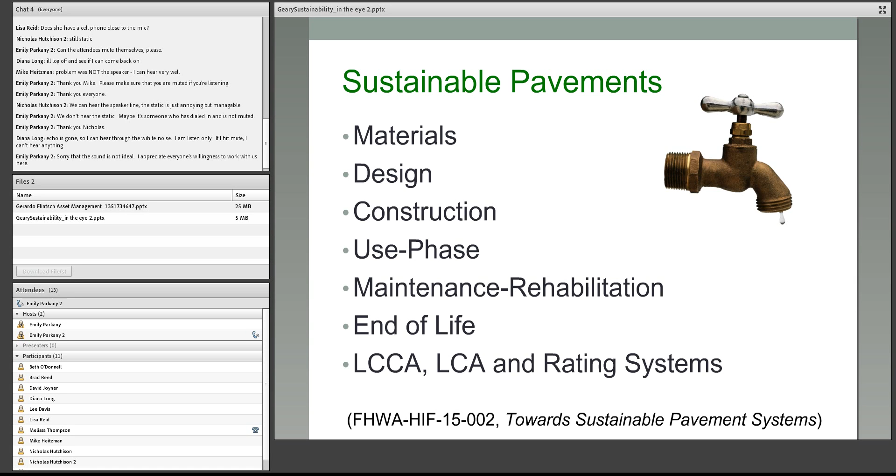This was something I thought was interesting - this was in chapter 10, on the future and environmental product declarations. I recently saw this in another presentation in an asphalt arena where they talked about UTC codes for materials in the future. And this is a concrete mix design and the environmental impacts for a concrete mix design.

And you're looking at the global warming, you're looking at ozone, you're looking at the whole environmental things. Now, as a materials person, I was a little bit concerned that they had two lines for performance metrics and over half a dozen lines of details and metrics for the environmental issues. But this was just a snapshot. If you look at the full document, they do have the complete performance metrics too, along with some more environmental impacts.

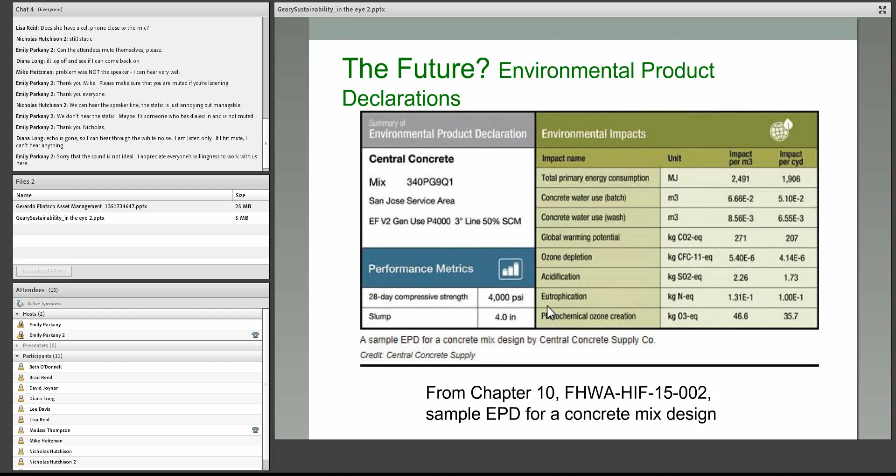First, I think education and people coming up with new things, that's sustainable. And the corollary is, mandating specifics, I think it's detrimental. You really need to provide people options. I know sometimes you got to mandate things to get things done, but if you mandate options instead of just mandating one way, that's a better way to think about it.

We talked about how it can take time for sustainable, and then the context nature. So when I took over the materials lab in 2000, we already had a standard on the books that said you could use recycled concrete to be a replacement for virgin graded aggregate base. But I couldn't tell where anybody had done it.

And so I actually saw a presentation somewhere else where a recycler was showing how to do it. You can't just recycle and throw it back in. You've got to process it. You've got to handle it correctly. There's steps that have to be taken.

And so I invited that recycler to come to our annual contractors meeting, just to kind of see if they would listen, I guess. And they did. Boy, did they listen. The recycling increased that next year, up to 500,000 tons. And now we're at about 100,000 tons a year, which is about 10%. And for an aggregate-rich state like Georgia, 10% is pretty good. We have lots of aggregate, lots of good aggregate. We're taking a bite of that pie, and it was just based on education.

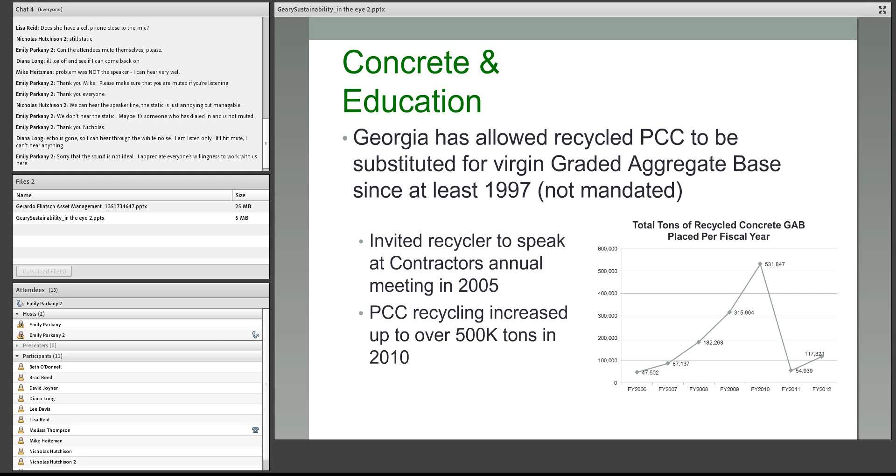Sometimes if you provide the contractors options, they'll come up with it on their own. On Interstate 16, they're out there right now recycling 100% of the concrete back into the shoulder pavement. And we've never done that before in Georgia on an interstate. Now, the contractor already had options for the shoulders, and so they came in and requested this as another option.

And we had the experience already with the concrete recycling on GAB. And from what I understand, the project is going great. I'm actually going out there to see them next week to get a visit of it.

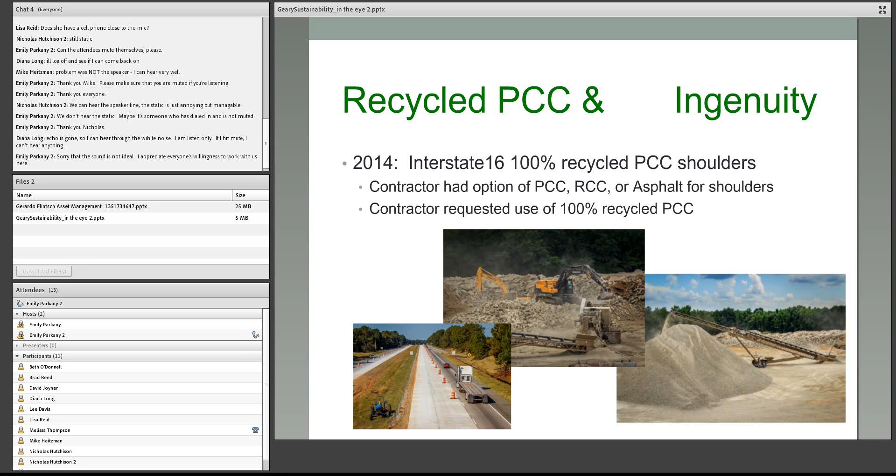Let's talk a little bit about time on sustainability. In 1981, I was doing some research on old interstates and found out that we actually put RAP in an interstate pavement back in 1981. I graduated high school in 1981. I mean, and I just retired. That's a long time ago. We've been doing RAP a long time.

And then we had a standard specification in '93. So another 20 years, just in 2012 - because what's happened is when we started out, we were at 10 and 15% RAP. And that was okay. But now, as things are getting tighter and asphalt got more expensive, contractors wanted to put 20%, 25, 30%. The same thought pattern that we had on the 10-15 didn't work on that 25 and 30% RAP.

And so we had to tweak those requirements. We were finding pavements that were cracking up within 4 years. We expect a minimum 10 years for our resurfacing. They were cracking up where we were having to resurface in 4 years. And so you gotta, I don't know if it'll ever be sustainable. You're never gonna reach sustainability. You gotta continually look at it and make changes to make sure it's sustainable.

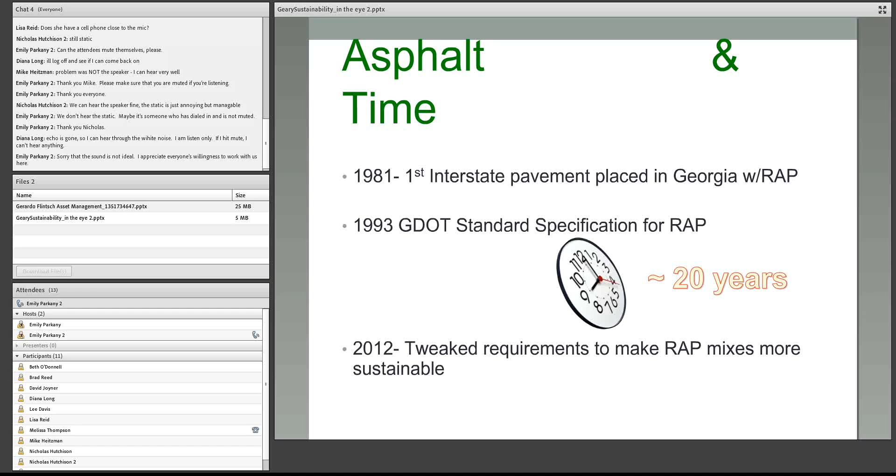Now, no money doesn't have anything to do with sustainability. It's actually a negative part, but that's what caused us to start using micromilling.

And this is more of a context thing. Georgia, conventionally, on our high volume interstates, we had a special mix called SMA, stone matrix asphalt, and then a thin mix on top of that. In the past, we would just mill off both of those and replace both of them. And we got to saying, hey, we need to find a way to save some money.

With a conventional milling head, we weren't going to be able to just take off that top mix. So we worked with the manufacturers and came up with this micro mill milling head that'll just take off the surface mix. So we're reusing that SMA for another time.

But if we're required on this project to check a box to get recycling, we won't be able to do that because it doesn't use any recycled material. We don't allow recycling in that top 1 inch because it's just too thin to use recycling. So that's the problem if you mandate something and say it has to be recycled - that can cause you problems, and then this process wouldn't work.

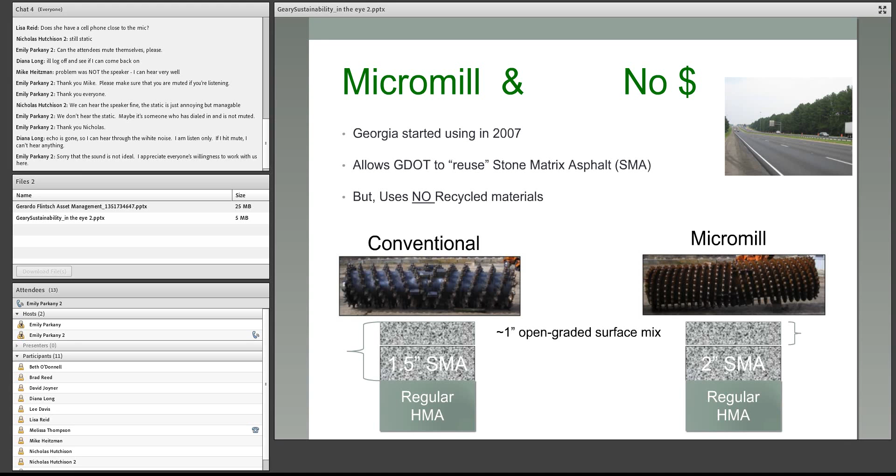Crumb rubber, that's ground tires. And this is another kind of a mandate thing. Pretend that mud is actually asphalt, because that's what happened. When I took over the materials job in 2000, my predecessor had left me a picture from the newspaper where cars had been stuck in the asphalt because of a crumb rubber project. We had a really bad experience. I couldn't find the actual picture, so I got close, but the picture itself is seared in the heads of the people that went through it.

And so sometimes when you mandate things and they go bad, it makes it even worse. But in 2007, we had problems with polymers in our asphalt - the prices were going crazy out in the roof. And we use polymers in a high volume. Polymers make it better than just regular asphalt.

So we looked at it again. This was another contractor that came to us and said, hey, we want to use this option because the polymers are so expensive, this will save money. And so Georgia DOT placed over 500,000 tons since then.

Now, we're not just assuming that it's going to work and that it's going to be the same as polymer. We're doing testing. We've got ongoing research that's looking at those original projects just to make sure that our assumptions that it is good are good assumptions. You don't want to find out after you have all these roads paved that they only last 4 years.

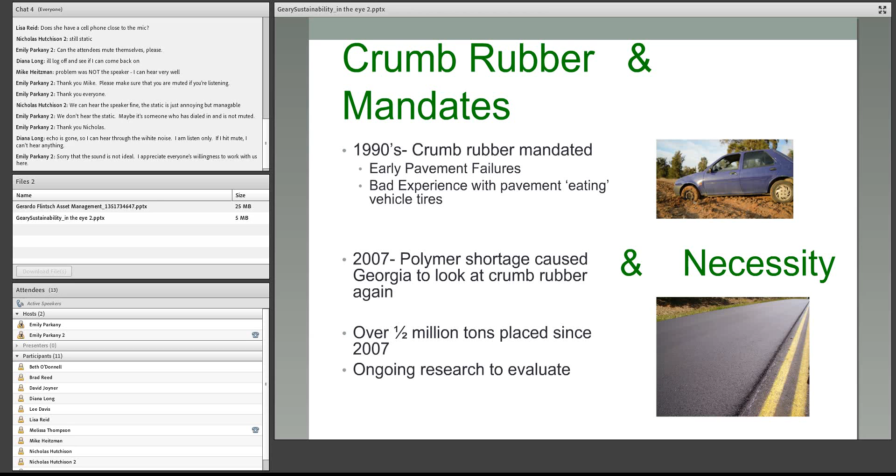All right, I said I would take you back to reality, and this is kind of my request as a materials practitioner and former DOT person. This is what the materials folks need - we need those vetted guidelines related to the environmental issues, and we need to get all those people together to make those decisions. And those are the hard decisions.

But you know, you can't leave the materials person to be the sustainable guru. They need the help, they need some input. But listen to them, too.

And then give options to fit the situation. I think it's always better to have options than to mandate something one way. Especially since sometimes the industries want to get it mandated a certain way - different industries have been known to go to the legislature and get laws made that mandate something a certain way, and that usually doesn't turn out good. And then trust them to make the right decisions once they have all the information and the input. Thank you.

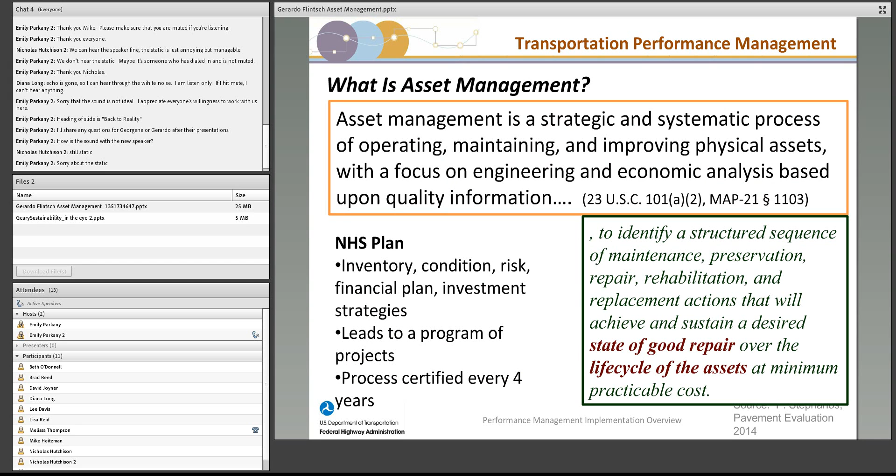For this, I've been using over the years a scheme that says the heart, the foundation, of any asset management system is a database where I know what I have—I need an inventory, I know the condition of those assets, I know how much they're used, and I also know what we need to do with them.

Based on that foundation, I will support a series of business process decisions at three levels. On the strategic level, I set performance targets, which we talk about first thing in the morning. That has to be associated with a budget. If I set very high standards, I'll need more money; with lower standards, less money. So I need to balance that trade-off.

Then I need to make decisions about my assets at the network level. At this level, typically I have systems to handle my pavements, bridges, signs, etc. — a series of individual engineering management systems that, hopefully if my asset management is mature enough, will integrate into a decision-making process that considers both performance and cost.

And I would argue we also need to start incorporating sustainability into those decisions — environmental aspects that will make our decisions more sustainable.

Once you get a work plan, with all these asset management network-level tools that let us predict condition and optimize investment, we come up with a work program. Then I need to design each of these treatments, each project in the work program, to be able to execute them.

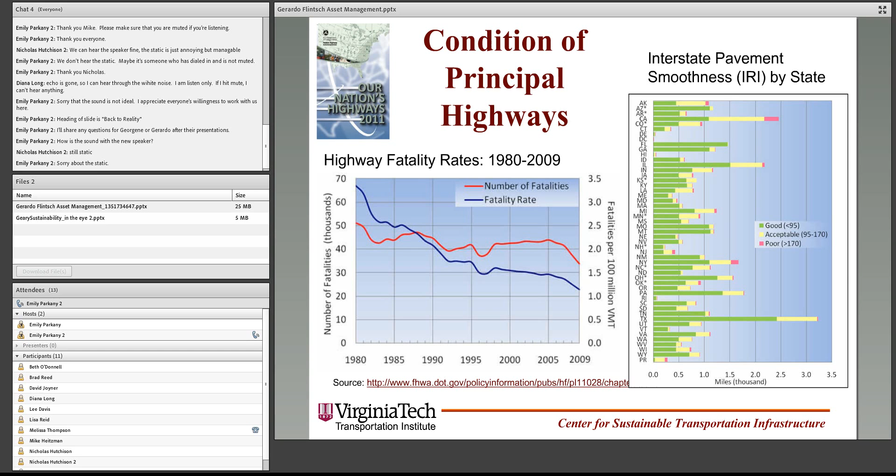That's at the national level. Most states at this point also have performance measures they share with users at the state level. Virginia has a dashboard that covers everything from road conditions to project delivery and many other performance metrics, published in a quarterly report posted on the website.

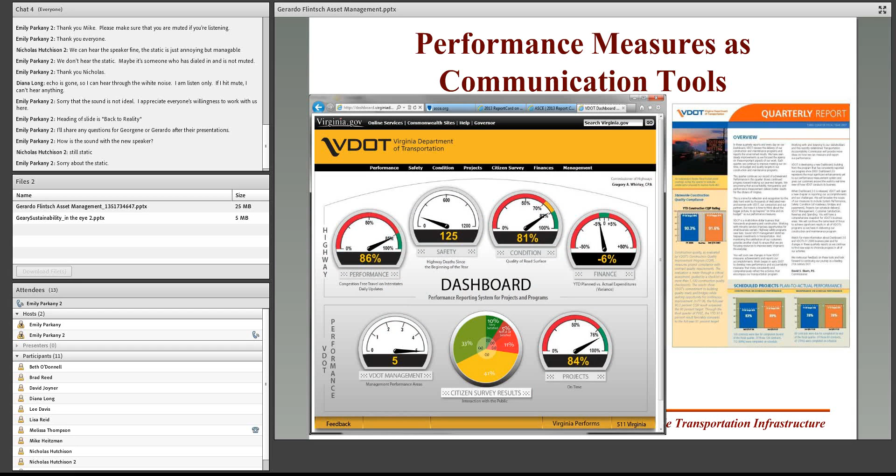So we have a series of goals that are translated into something we can measure, and those measures are what we use to track our performance — how well we're doing in making our investments.

That brings us to the last concept: state of good repair. I struggled to find a definition, then found one and adapted it slightly: the state resulting from applying transportation asset management concepts, balancing economic and performance aspects, in which an agency maintains physical assets according to a policy that minimizes asset life cycle costs while avoiding negative impacts to service.

Again, I would argue we probably need an environmental component there too. And of course, it's hard to define by itself, but easy to define what is not a state of good repair. And if you believe an ASCE report, most of our infrastructure is in a state that is not in good repair. So the common themes are: achieving and meeting certain levels of service and performance for the user, performing maintenance, repair, and rehabilitation according to the policies we set to help us achieve our performance objectives, and reducing or eliminating a backlog of unmet capital needs. The 3.6 trillion that ASCE cites may be too high, but it's in the right order of magnitude, so we have a big backlog in our infrastructure in general.

And of course, that's what we try to do with asset management. I would argue all three of these concepts work together to help us align our decisions with our performance measures and performance objectives.

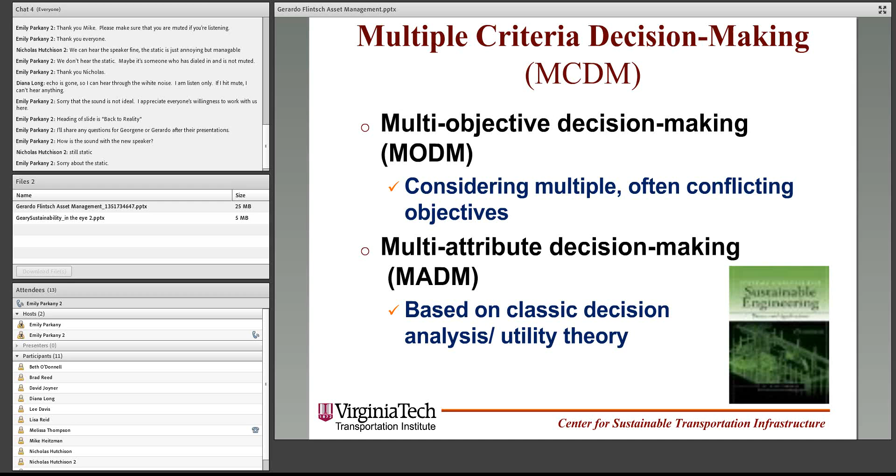So that's one way, and then you also look at maybe projects and comparing projects. There are other types of tools within this family of multi-attribute decision making that usually involve utility theory, decision analysis, and so on. So there are tools, and in particular, I'm going to focus on just one to illustrate this.

If you look at optimization, it's a decision-making tool that selects the best combination of treatments, where we need to act, what type of facilities—bridges, pavements—we need to fix, what type of treatment we need to apply, and when is the optimal time. So I can set that to achieve a specific objective.

For that, I have operation research techniques I can use. Again, the main part there is I need to figure out a realistic decision-making process and come up with the mathematical models that allow us to model that.

And of course, that implies that if you really want to achieve sustainable transportation, I need to consider multiple objectives that reflect these three legs of the sustainability concept, the triple bottom line: economic development, ecological sustainability, and social desirability. I would call this high-level performance, which I can then reflect in objectives, and I can come up with ways of measuring that, and I will have to do some trade-offs.

And usually what happens is there's not going to be one solution that's better. What we have is a family of solutions that, from an operations research terminology, is called a Pareto set of solutions that satisfies the constraints and gives a good balance between the different objectives. If we go back to the two objectives we've traditionally used in pavement and bridge management, those are

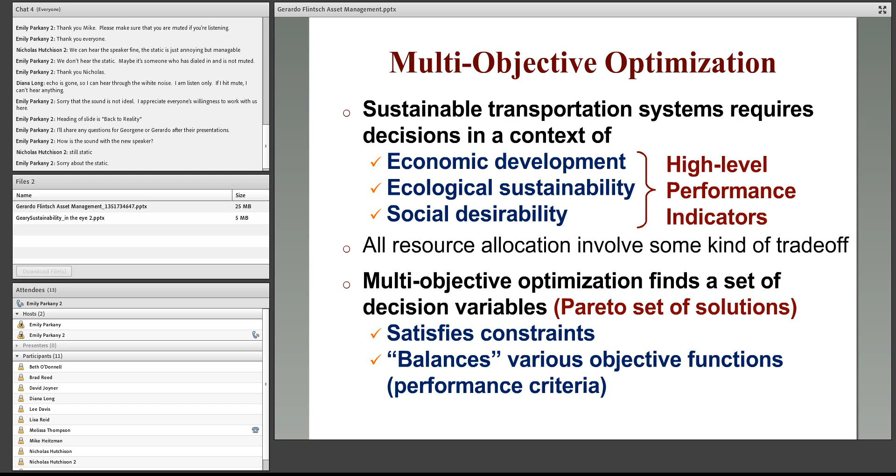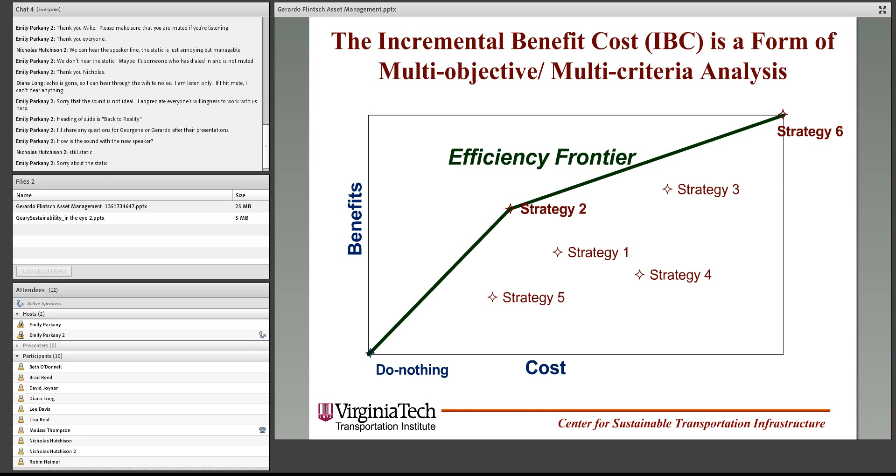And in pavement management, for many years, we've used this concept of incremental benefit-cost to do an approximate optimization for our investment. Most of the pavement management systems we have right now, and a lot of the bridge management systems, use this concept. It's an easy way to figure out, depending on the budget I have, which strategy I can choose that will give me the optimal benefit for that level of investment.

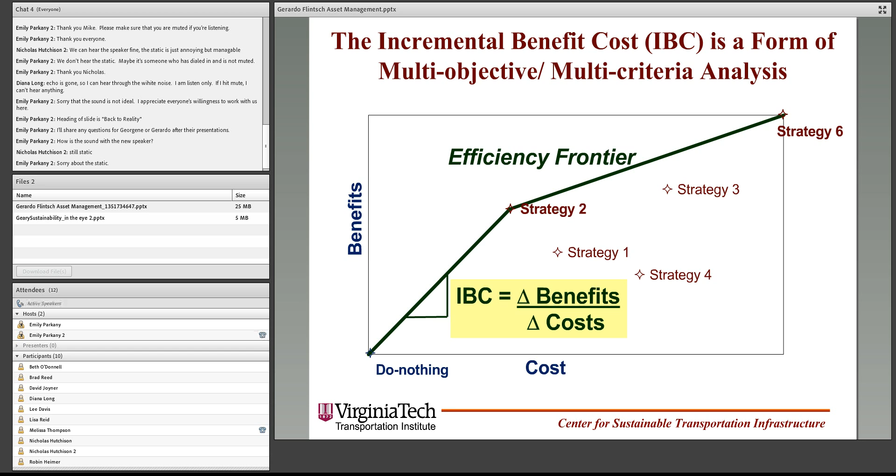So that brings us to, okay, how do we apply that? In this, I'll choose 3 examples. The first one is a network level example.

If you look at this plot I'll show you, Filippo did his PhD looking at how do we add environmental considerations to this decision-making process. He called it eco-efficiency values in a more comprehensive decision support. So now instead of the 2 traditional indicators, cost and benefit, or performance, what about if we add the environment there and then use a similar approach, a multi-attribute optimization, to come up with the ultimate strategy? So we said, well, if we use cost as an indicator of economic development, performance is the quality level of service that affects the social aspects, and then I'll add environmental aspects as the third dimension, and the way we try to balance.

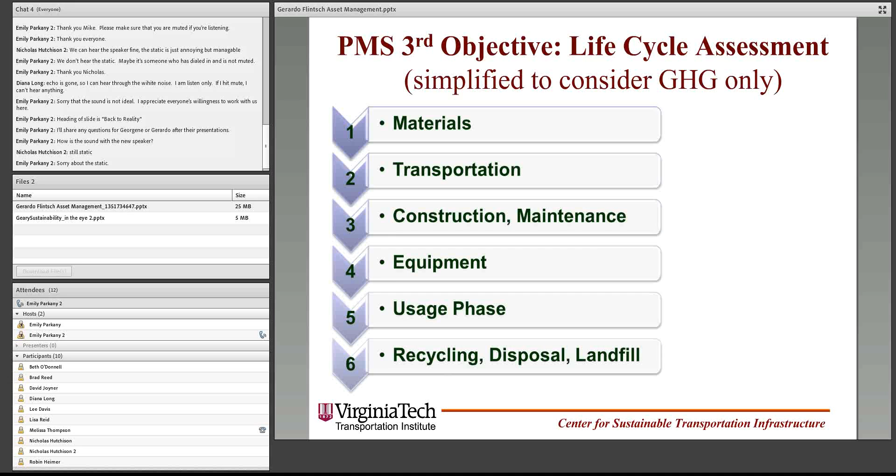For the environmental aspect, what he did is a simplified life cycle analysis where he only considered greenhouse gas emissions. You get the various steps in the life cycle of the pavement, including the use phase, to develop a carbon footprint tool, a very simple tool we use to assess the performance. Then you can check your different alternatives where each time you do some project. One of the things we did in his case, we were going to consider the use phase, but we didn't - we incorporated it in the next example I'll show you later at the project level. Each time you have construction, there will be some emissions generated, so you can minimize the emissions.

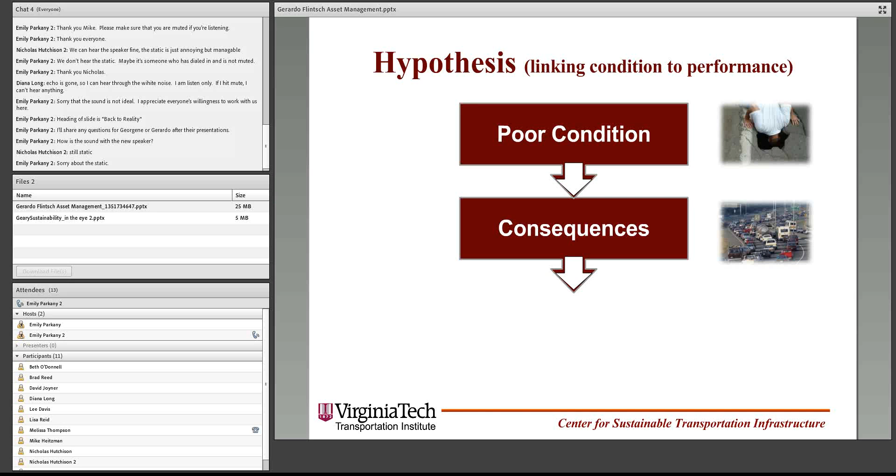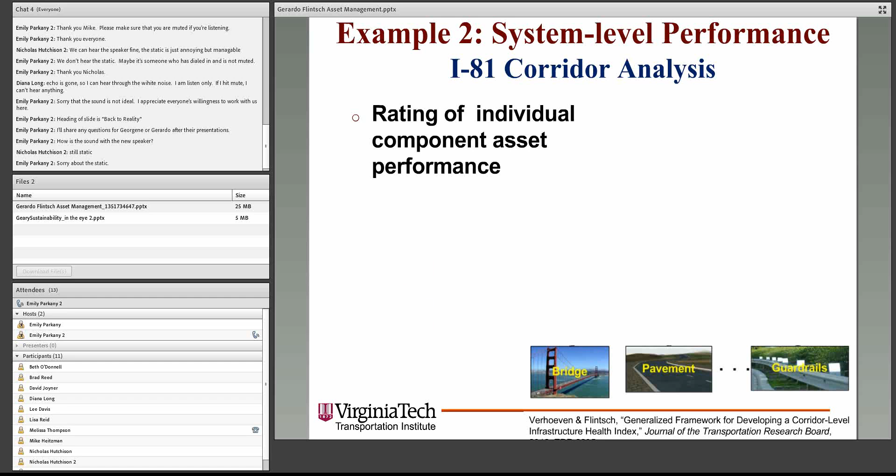So we did a case study, and there were some master's students whose work was used by Mohammed as part of his PhD later on. The idea is you can rate each of the individual assets based on various parameters related to functionality, condition, sustainability, etc. Then you can aggregate those indicators at the corridor level and at the higher level.

For example, we looked at the database in I-81 in Virginia, and we selected 50-mile long segments just to illustrate this. So what data do we have for pavements? We have IRI, rutting, and cracking. For bridges, we have the element value. Based on that, we could figure out the structural and functional condition of those by weighting these different elements and come up with some type of indicator that we can combine into a pavement health index, which then we integrate into a corridor health index, and we balance it.

Then what Mohammed did, using this information, was look at a very simplified network with little segments of corridor, and look at the distribution of how much I invest in pavements and bridges and how that impacts my system - the indicators I have here for pavements and bridges and then the overall corridor. Based on that, you can figure out an optimal allocation that gives you a good balance between the two.

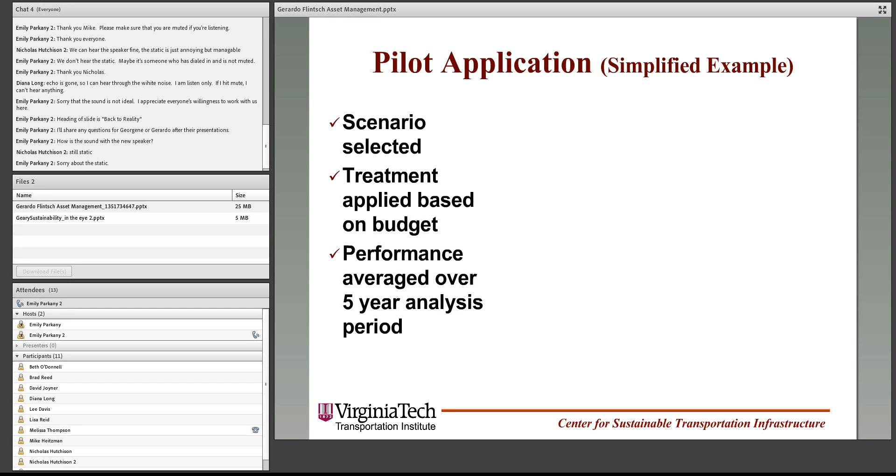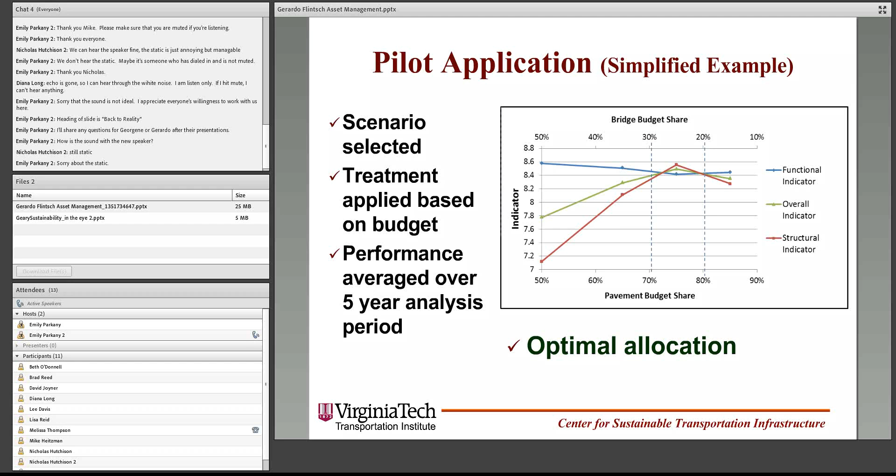And that gave us about 75% investment in pavements and 25% in bridges. Again, this is just considering the two aspects, the functionality and the condition. You can use other parameters to achieve the structural condition measures. And then, of course, the risk of maybe losing a bridge would be much higher, so we may weight it differently because of that.

And then he went ahead and said, well, if we make this more general, and I look at the road conditions, if the road conditions are bad, it will affect my capacity and risk of collapse. That will create traffic detours, reduce my network efficiency, increase my travel time. So I can use those parameters to see the network performance and the vulnerability of that network. We define vulnerability as how far the performance moves from the one where the network is not disrupted, and look at the impact of my decisions on these various network measurements.

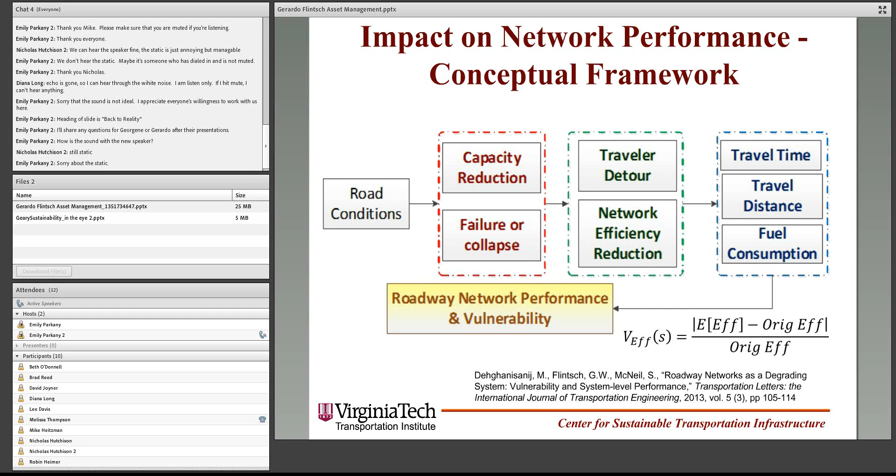Again, that's more at the strategic level. Finally, the last example is much more down to earth. We had another student looking at how to do this at the project level, how to balance performance, cost, and environmental impact at the project level.

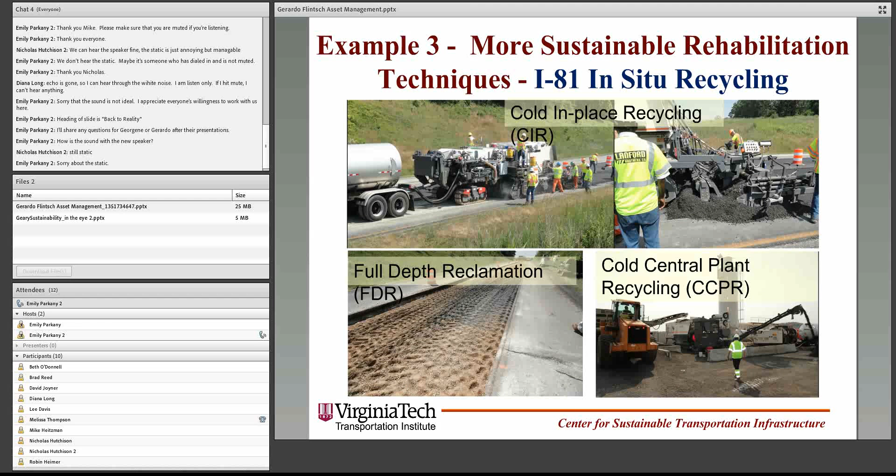So we've been looking at a project we contracted a few years back in Virginia where we compared different recycling techniques: cold-in-place recycling, full depth reclamation, and cold central plant recycling, all in one project. Actually, it's one of the examples ASCE has chosen to illustrate good practices in sustainability in the rating system. But the idea is that we compare a lifecycle cost analysis.

Joao Santos has been working on this. He's a dual PhD student from the University of Coimbra and Virginia Tech. And we compare three things: recycling-based rehabilitation, traditional rehabilitation meaning reconstruction, and corrective maintenance.

What happened is in that segment, VDOT had to rehabilitate it almost every 3 or 4 years because the structural condition was gone. So they kept it going by doing milling overlays, but that wasn't very cost effective, and that clearly shows that it's the less cost effective option. With the recycling, the life cycle cost over 50 years was reduced to about half of what it was originally.

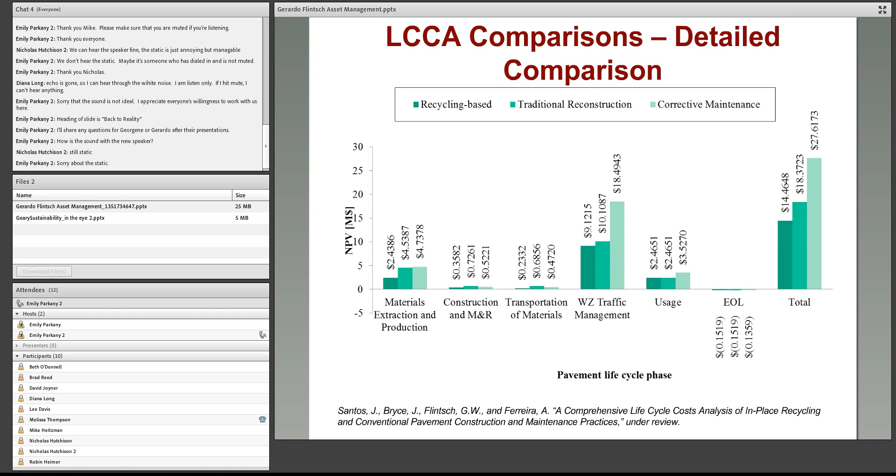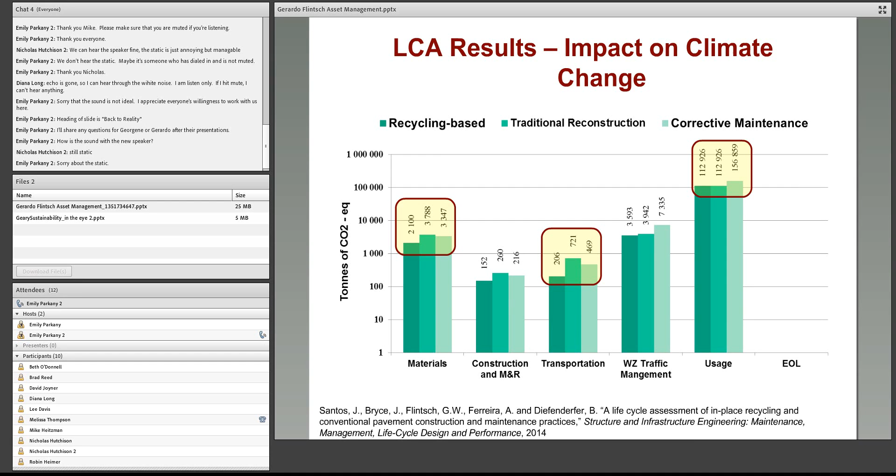So just to conclude, asset management is a key function for most highway agencies that have adopted this concept. It helps align our preservation and renewal programs and budgets with user expectations, and of course align them with the performance goals we set for our system, our network, our programs. Sound asset management is needed to provide sustainable highway infrastructure systems. And I think that's all I have. Thank you.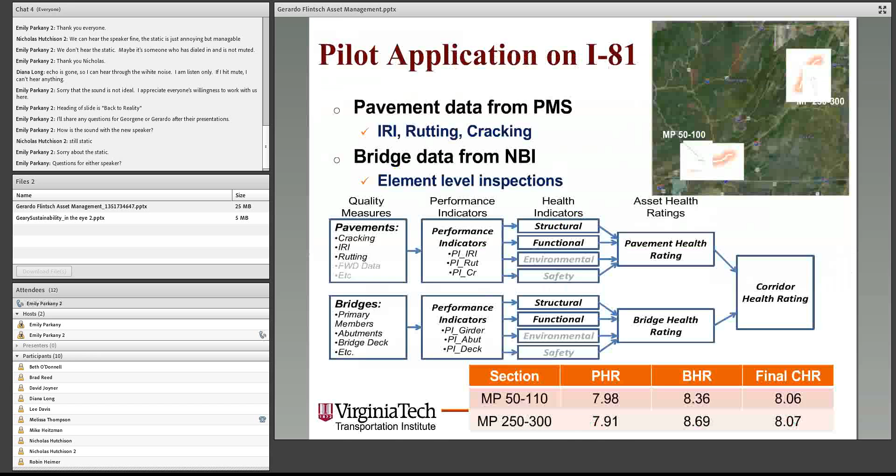I wonder if you have a few thoughts on that. My own observation was, since we have dollar equivalent numbers by year for carbon dioxide anyway, could it be an easier analysis to do and explain if we could try to go directly to the dollar valuations instead of the weighting criteria?

That's a very good point, and that's one of the questions that always come up when we have this discussion. A few years back, we had a workshop we hosted that we got people from Europe and the U.S. to talk about sustainable pavement, and that was a big discussion that came out. Why don't we make this a uniform unit in dollars? Some of the more purist folks that deal with life cycle assessment and all that, they really don't like that concept.

Again, it's a practical way of doing that, so it's a different way. And again, you are doing it anyway because somehow you need to weigh those. An option would be maybe to translate what we do often in life cycle cost analysis - for example, we look at the user cost from the agency, the user cost for the users, and then we give a little less weight to the users because this is not a direct cost. Maybe something similar we could do.

But I agree, maybe the way of doing it is bringing everything to a common scale so then we don't have to worry about this. This is another way of looking at that if you don't want to use that. But yeah, that's a discussion that comes every single time. And I don't know which one is better, and I don't have a big feeling for it in a way.

I know the World Bank, for example, in the HDM4 model, they do get emissions translated into dollars, and they put it as part of this in the same unit. So at least, that's very commonly used in developing countries for assessing projects. Perhaps we could talk a little more later, but...

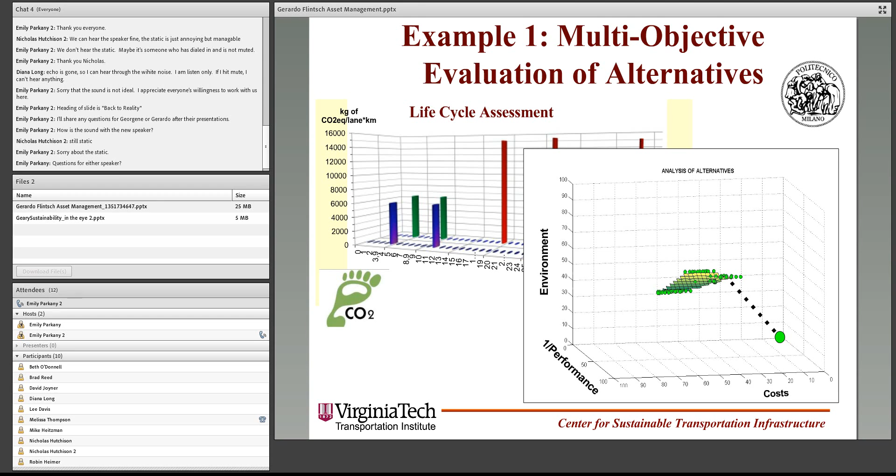Eventually it will start to degrade and go back down, but that's another good indication that there's a good chance it will work well long term. There's a lot of experience in other countries and states showing these treatments work quite well. It doesn't work in all conditions - you have to select the right application for the right problem. What we're trying to do is see that it can be incorporated as another tool in the pavement management toolbox, another rehabilitation strategy.

There seems to be quite a bit of agreement on this. What we've run into a little is that some of the more traditional industry isn't too happy seeing too much recycling, because it means they have to reinvent themselves a little bit. That's been the main obstacle we've found in the state - trying to break down the business model that used to be about milling and replacing the surface of the pavement. I guess that's probably a very common problem everywhere.